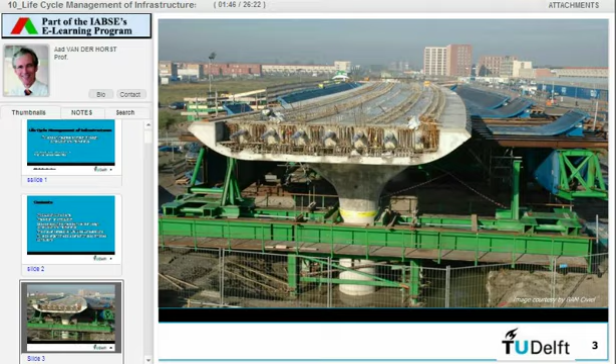Triggered by privatization in many countries in Europe, infrastructural schemes are more often than before developed, constructed and even maintained by private companies. The successful company gets the project awarded through a tender procedure. To be successful, a most competitive proposal must be developed, which at the same time must comply with all relevant requirements. These objectives can only be achieved if life cycle costs are optimized and integrated design procedures are followed.

Design engineers should not limit their horizon to design aspects only, but need to consider the service life cycle on a holistic basis. This means that a strong interaction with the other disciplines involved is essential. Apart from the other design disciplines, a close interaction with cost estimation, work preparation, procurement, construction and maintenance is essential. To perform in such an environment, design engineers should understand the process they are in and the interactions that should be managed, but also need tools and criteria to make a contribution to the overall process. And that's where the gap often appears in practice.

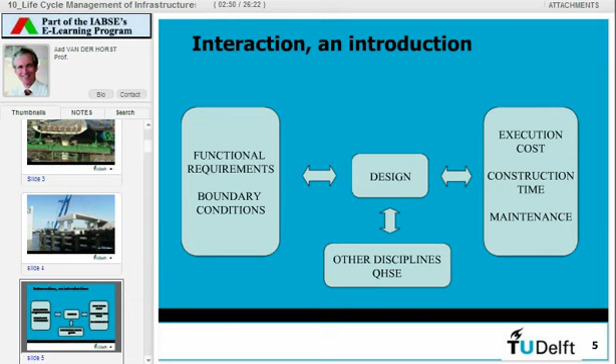The primary interaction is between design and the functional requirements and boundary conditions on one hand, and design and the execution and maintenance aspects on the other hand. But also the interaction between different engineering disciplines should be considered, as well as the interaction between design and quality, health, safety and environmental care. Properly performed interaction is a decisive success factor to develop and realize effective and efficient civil engineering structures. From the relatively easy schemes to the multidisciplinary complicated schemes, the same basic principles apply.

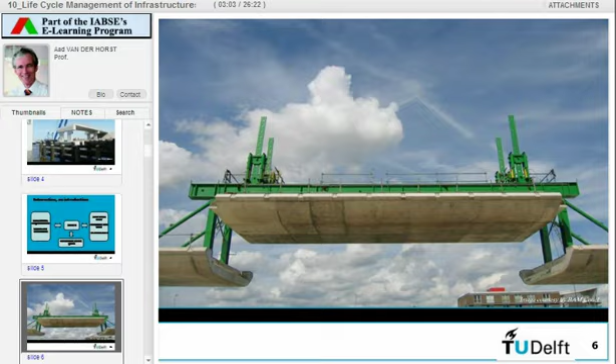Design engineers should, as part of the design, identify and optimize the cost drivers of the scheme: the manpower required, equipment needed, material demand, construction time required and the applicable cost related to maintenance and repair. The optimization in this respect is the effort to reach a structurally and economically justified scheme that complies with the functional requirement in the most effective and efficient way.

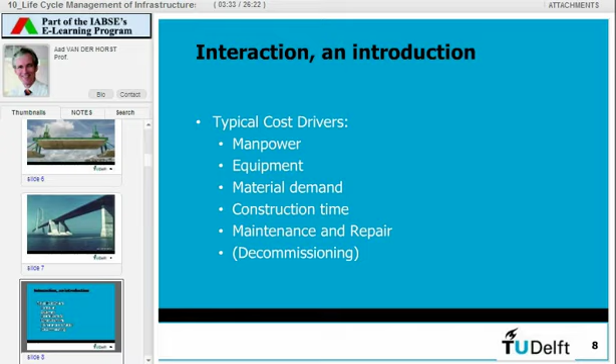During the development of the concept, interaction will generally lead to alternatives. The alternatives may be fundamentally different in the way they cope with the many aspects of the scheme. The choice between alternatives is generally governed by cost considerations. To serve as a reference parameter, cost should be integral total cost. For the more complex infrastructure projects, and especially for through-life approaches, cost as a fixed numerical value does not exist.

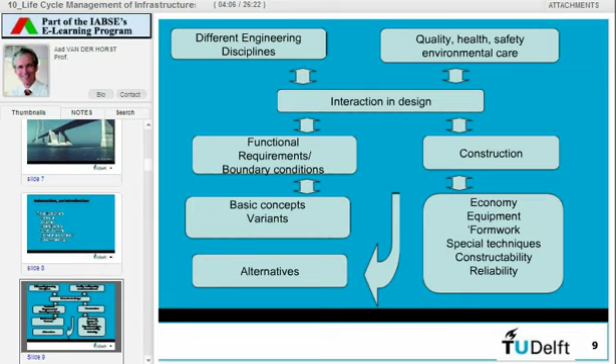The complexity of cost components is often at a level that a risk-based approach of cost estimation is required. Such an approach is presently the state of the art. The result of a risk-based cost calculation is a probability density of anticipated cost. And design engineers have a significant contribution to this process, as in design, freedom is converted into specifications. And as such, the process should be performed with a through-life focus. As such, interaction is a key success factor.

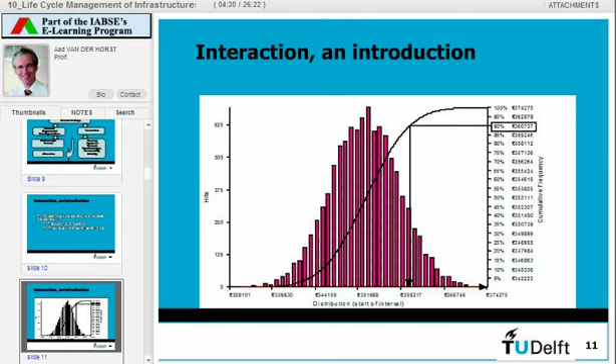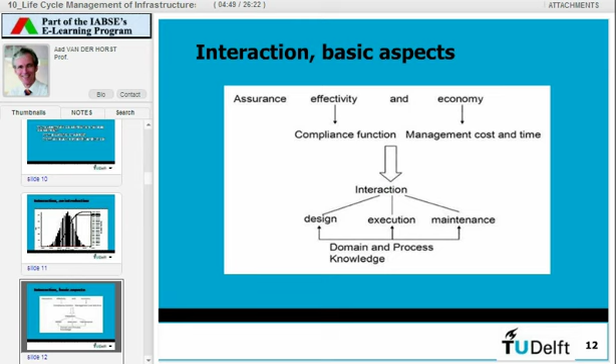Interaction between design, construction and maintenance is a must to assure effectiveness and economy of the scheme. Interaction between design, construction and maintenance is not a well-established basic attitude of individuals involved. To interact, one should have a clear understanding of not just the knowledge domains involved, but also of the driving mechanisms